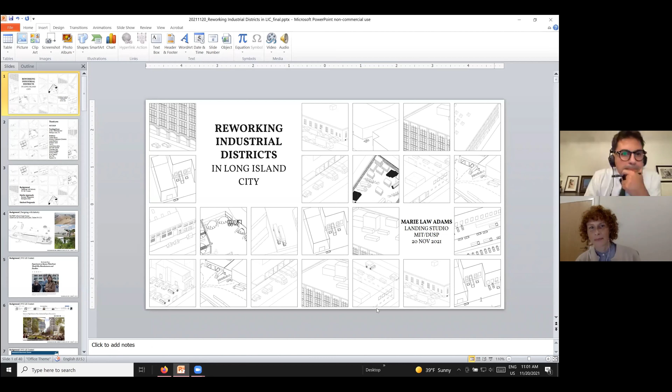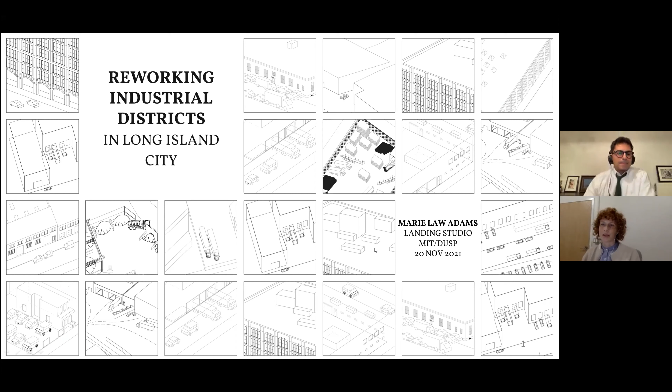So here I'll be presenting the work of an MIT urban design studio that I led in the spring of 2018, where we explored design and policy strategies to strengthen Long Island City's core industrial areas. Long Island City, for context, is a district within Queens, one of the 5 boroughs of New York City. Before I start, I wanted to acknowledge and thank MIT's Department of Urban Studies and Planning for providing the travel funding for the studio, and my co-teaching team, Xi Qiu and Pim Jular, and especially the 13 city planning students whose thoughtful and creative work you'll see today.

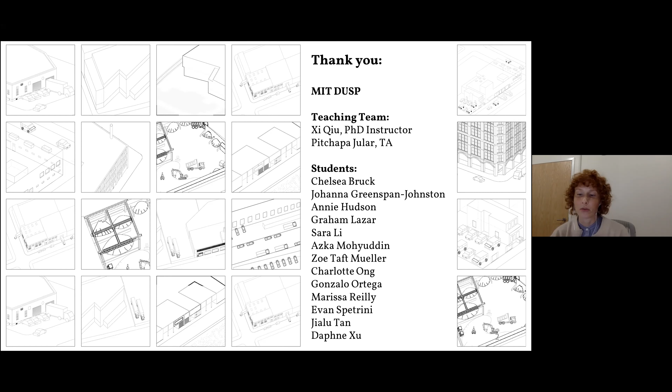I've divided the presentation into 3 parts. I'll talk first about what led to this studio and some background context on current development and industrial policy initiatives in New York and Long Island City, then talk about the studio approach, which was divided into 2 sections: Business biographies, involving field work with industrial businesses, and Ecologies of Long Island City, which looked at the physical form and policy frameworks of industry. I'll conclude with a couple of design proposals generated by the students.

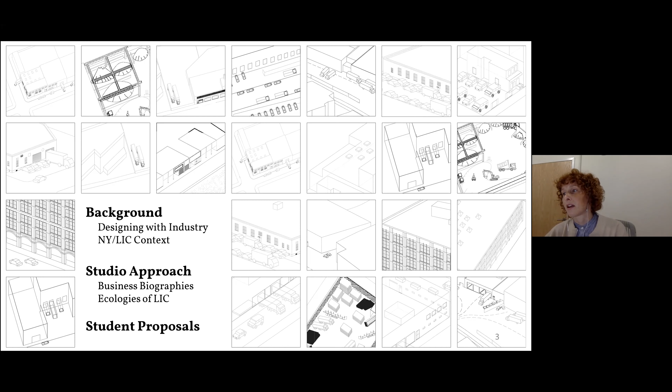The work that we did in the studio was intended to offer concrete visions for Long Island City that would complement citywide industrial economic development initiatives, and also contribute to a growing area of study on urban design, physical planning, and policy to support the development of contemporary urban industrial districts.

I wanted to share a little of my background as a practitioner to give some context for the type of approach that we took in the studio. As Olgu said, I run a practice in Boston called Landing Studio, where our work is focused on the design of industrial districts like working waterfronts and infrastructural spaces like highway viaducts, where we're looking to improve the urban public realm, human experience, and natural systems.

So industrial uses during the winter, and then waterfront recreation during the summer months when the salt stockpile is reduced in size. The project also generated guidelines for the industrial business, where salt stockpiling configurations were designed to benefit nearby residents in terms of freeing up views to the waterfront and designing truck routing and queuing to increase pedestrian safety and minimize the amount of time each truck spends in the facility, contributing to better air quality for the neighborhood.

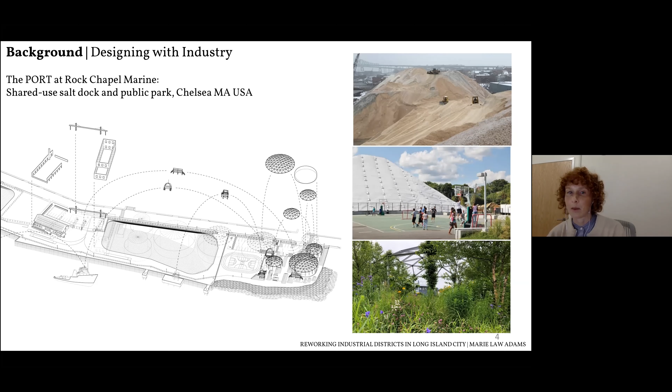This quote was something of a launching point for the studio, pinpointing the tension between New York's strong development market, the housing crisis, and the need to develop more affordable units, and how this affects what industrial spaces are left in the city. The word messy points to the problem with traditional land use planning that separates residential from industrial districts, which has become impractical given the city's diminished supply of developable land. As both the city and developers scrutinize every parcel, less profitable or competitive industrial uses have increasingly been pushed out of New York.

In this article, Glen was also referring to the city's quest for solutions through new types of industrial mixed-use development, leveraging the market to increase the supply of industrial space and good-wage industrial sector jobs. The city was testing this concept with a set of major projects on Long Island City's East River waterfront, where light industrial uses on lower floors would be cross-subsidized by residential towers above.

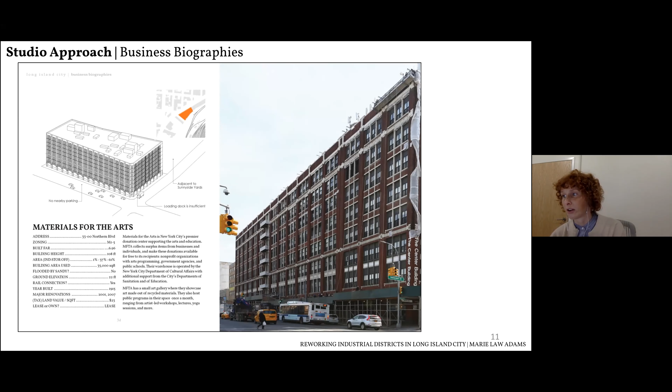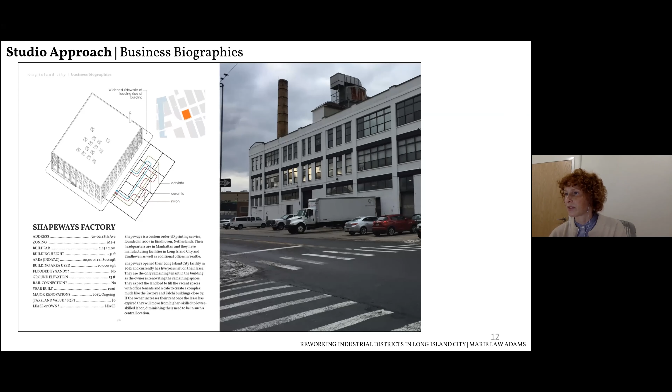There were a few examples of more traditional vertically integrated manufacturing, like a very large cosmetics company, to advanced manufacturing and development, like the Shapeways factory you see here, or Voice Technologies, another one we visited.

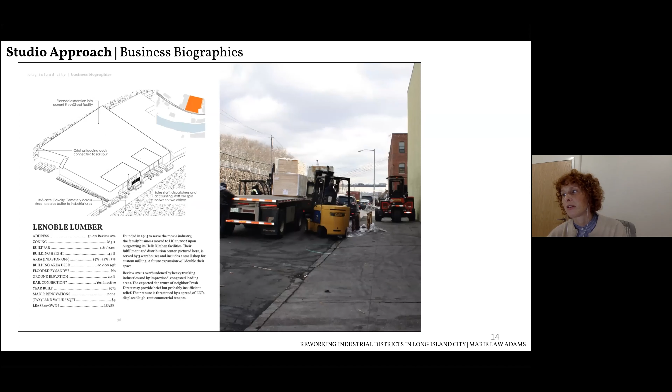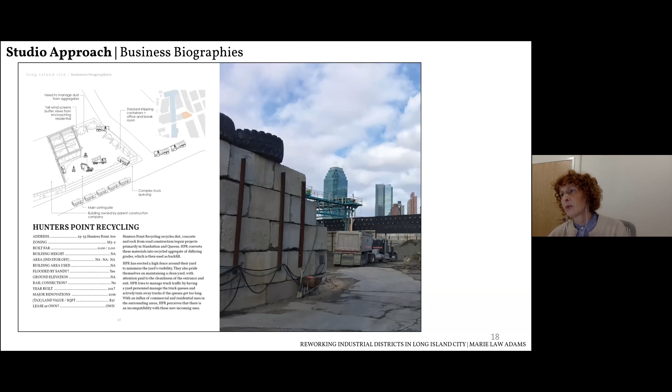More artisanal production like Ranieri sculpture casting, wholesale warehouses and suppliers like Lenoble Lumber or General Insulation, High Fresh Asian food products, and Rapid Steel, to really heavy open air industrial facilities like Hunters Point Recycling and Sims Metal Management.

So we compiled all of the fieldwork and distilled about 6 common themes that we were seeing, which offer some insights into the policy, physical planning, and public realm issues for these businesses.

The first was tenure and transience. It was unsurprising to us that property ownership status heavily influenced a business's future plans in relation to being in Long Island City.

Business renters faced uncertainty, disinvestment, and landlords speculated on future development opportunities of their industrial properties, so many were eyeing their move out of the city.

Risk was another factor. Although a lot or most of Long Island City's industrial areas lie within the floodplain, and some had fairly major property damage from Hurricane Sandy, very few had concrete plans or funding to strategize how to survive the next major storm and sea level rise.

Incremental growth is something we really saw with a lot of facilities, where they were overflowing with materials and equipment, turning sidewalks and streets into improvised loading zones, stockpile areas, and employee parking lots. The public realm was completely taken over by industrial uses informally.

At the same time, increasing congestion on the streets was causing delivery delays and raising questions about whether the area's infrastructure had the capacity to grow.

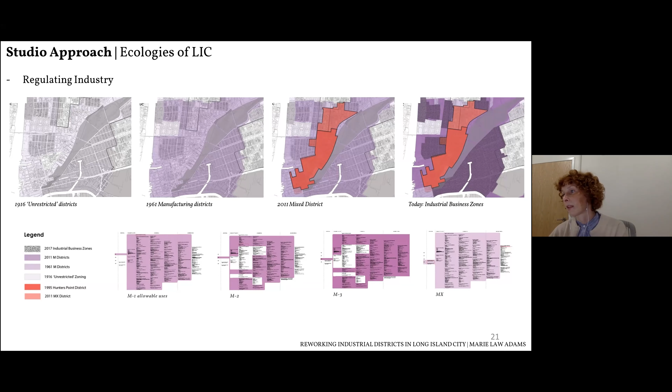So this led us to ask, what would a forward-looking industrial zoning policy look like? Could you actually get mixed uses in a way that doesn't result in the loss of industrial space? And how can policy support Long Island City's existing industrial uses while offering pathways for growth and change?

The anatomy of Long Island City—we really found that the urban fabric of Long Island City is very fragmented and disorienting. This can be traced back to the development history, where Long Island City started as an agglomeration of 8 independent urban villages. It also holds several large-scale developments, like the largest public housing complex in the country.

All of these things create some interruptions in the urban fabric, which led us to questions of whether the proposals should seek to better connect these pieces together, or whether the discrete parts offer a unique opportunity to cultivate different productive districts with unique identities.

The physical fabric—different eras of industry and transportation produced different patterns of buildings and open spaces. This is looking specifically at the historic freight rail networks that have created a whole family of oddly shaped buildings and dead-end streets born out of the network, leading us to ask, how will this palette of industrial buildings and infrastructure patterns shape the future of Long Island City's productive public spaces?

And in the public realm of industry, we started to look at the sidewalks as this contested zone where semi-trailers and forklifts and cyclists and parked cars were all jockeying for space, and noted that the streets and sidewalks are where the frictions become most immediate and physical between industrial and non-industrial uses. So this led us to a question of whether there are benefits to this flexible and dynamic public realm, or whether future visions should seek to ease these conflicts by delineating zones for different mobility systems.

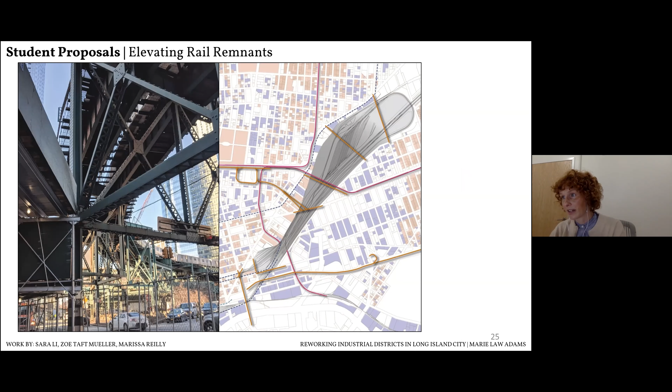So the first is called Elevating Rail Remnants. This is a project by Sara Li, Zoe Mueller, and Marissa Reilly that looks at the historic freight rail network that supported Long Island City's original industrial growth, where they point out that both present and historical traces of rail have resulted in an interrupted fabric of urban parcels, buildings, and circulation infrastructure.

So here they're looking at the biggest rail yard, Sunnyside Yards, that separates Long Island City's industrial Newtown Creek district from the downtown area, and how over time it's created this collection of irregularly shaped residual parcels that you see inventoried in the graph on the right.

Their first major move in the project was to propose a new connection across Sunnyside Yards using existing rail structures to improve transit connections and shorten worker commutes that are inconvenient and disorienting due to the prevalence of disconnected roadways.

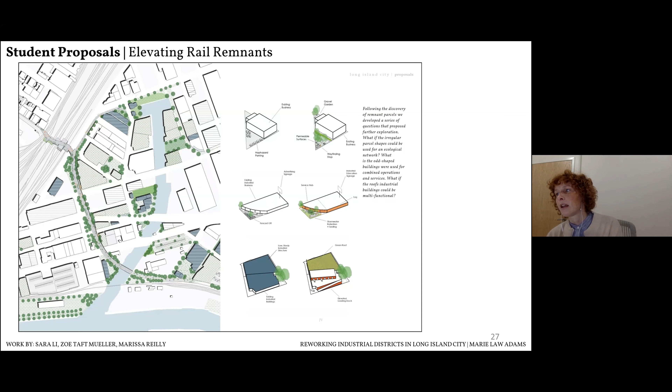Then they looked at the rail remnant parcels themselves that are either today underutilized or used informally for parking and staging, as something that could be seen in their aggregate as a new network that could be stitched together to support industrial operations and workers, while also providing ecological and social benefits by introducing green stormwater management, tree cover to reduce the urban heat island, and new pockets of public open space.

They also look to utilize the roof structure of some large industrial buildings to mediate between the elevated rail connection on either side of Sunnyside Yards.

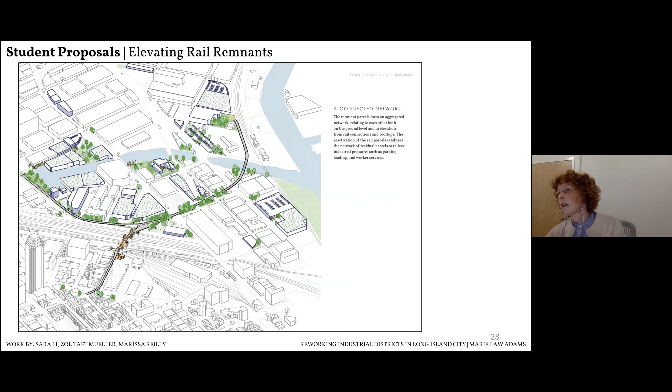So this is looking at their ideas for some of the uses of the remnant parcels for ecological benefit, drainage, open space, industrial support space, laydown areas, and so on.

And then here they're looking at specific moments within the new interconnected circulation and open space network, where they note that the programming includes social gathering spaces, observation decks, public art installations, landscaping, and a series of showcase rooms that are intended to be used by Long Island City industrial businesses, the ones that are more public facing.

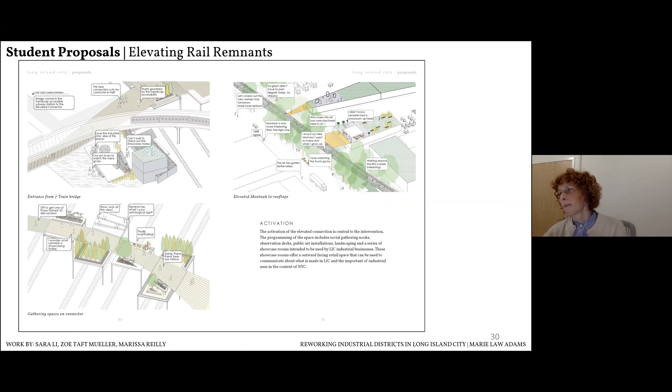And then finally, I'll close with reimagining the 10%, which is designing a public realm network for Long Island City's workers and industries. This is by Chelsea Bruck, Charlotte Ong, and Jielu Tan.

This project offers ideas for the improvement of the public realm in Long Island City's industrial business zones, with an emphasis on the everyday experience of local workers, by focusing on two main issues: the lack of food and beverage establishments and the absence of nearby public spaces.

These were things that they directly observed in the interviews and tours with Long Island City businesses during the business biographies fieldwork phase of the studio.

Their proposal takes as a starting point an existing program run by the city called ICAP, the Industrial and Commercial Abatement Program, which provides tax relief benefits to industrial businesses that improve or expand their existing building, as long as they use less than 10% of their space for retail purposes.

So the student group chose to experiment with a new way of looking at that policy, where they thought: what if we actually incentivize the production of small retail spaces for food establishments to improve worker quality of life and social ties within the industrial districts?

They also proposed an addendum to the program that would incentivize businesses to build new public spaces by offering similar types of financial benefits. Building on this framework, their proposal imagines a whole pilot network of new food, retail, and nearby public space, augmented by creative ideas for collaborations across local businesses that could take full advantage of having additional public space.

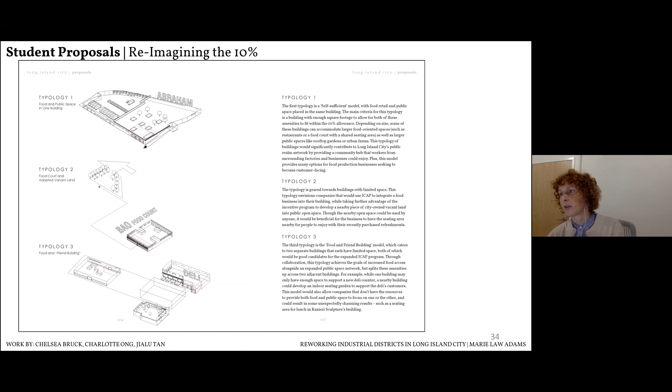And so this is looking at that idea at more of the district scale, creating a network of new spaces for food and gathering.

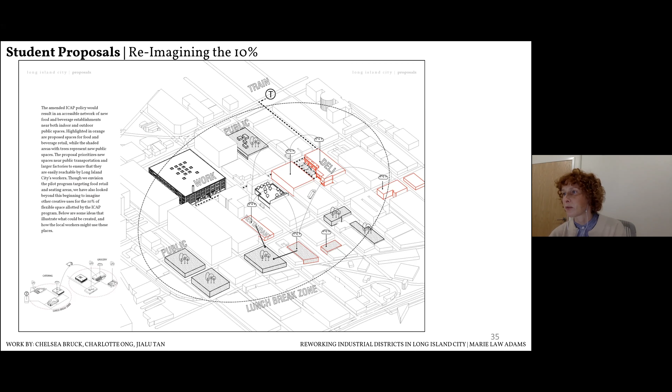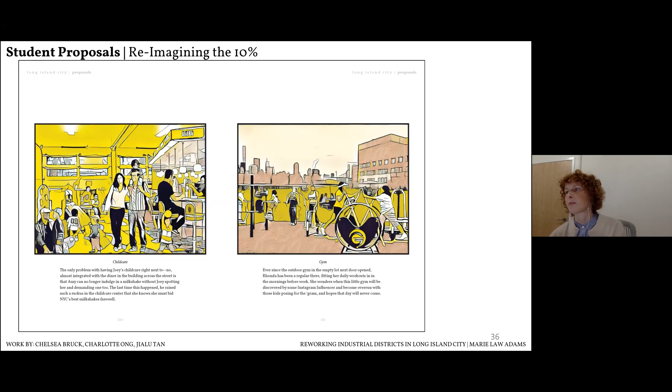You provide a very systematic and peculiar approach, a framework to deal with that issue as an urban project. You incorporate architectural issues, which focus on the internal productive space itself, and also the public space. I think this is an approach to be revisited in our studios. So my question is about the practicality of the issue. Zoning is a term that has taken place in planning theory, borrowed from planning practice in the States. So it's really an American term, zoning itself. Many cities in the United States have very strict zoning regulations. Can you please elaborate more? You slightly touched upon this issue, but how do urban designers and architects deal with those regulations to integrate some kind of hybrid solutions, so-called, and new mixed typologies within their own projects?